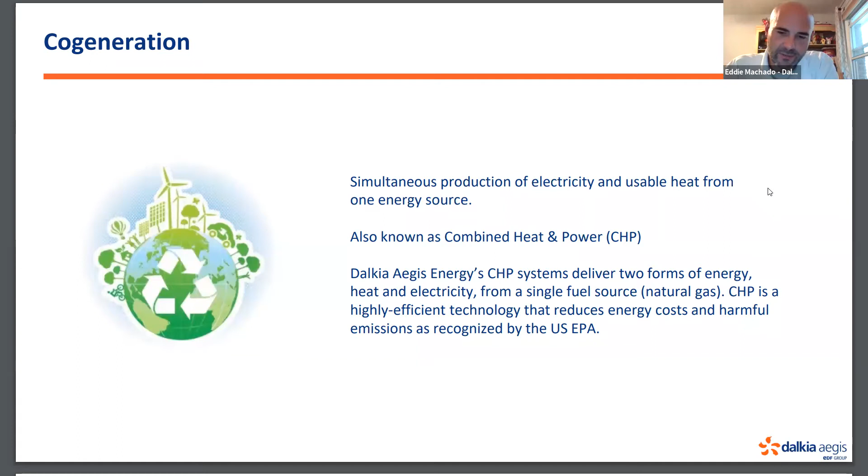As far as advantages, what we believe differentiates us from those in the space is really one point and one source of accountability from start to finish as it relates to cogeneration. So the first step in our process is to work with those individuals who are either advising facilities management and decision makers, or those directly involved in the energy decisions for their facilities.

We really start with a full financial grade energy analysis by looking at the utility billing and assessing exactly what sort of consumption exists in any facility, so that we can talk about what sort of on-site assets can be deployed and utilized in the most effective and efficient way. This is a financial grade analysis that can be utilized for financial purposes, as far as loans and other things, and this can also be insurance backed, so you have a certain level of guaranteed savings that can be realized.

As far as the financial assistance, obviously we work with our clients to help them both in terms of assessing different incentives that exist out there, as well as tax credits and incentives, so that the financial analysis that is done takes into account the overall cost of what it would be to implement this sort of strategy.

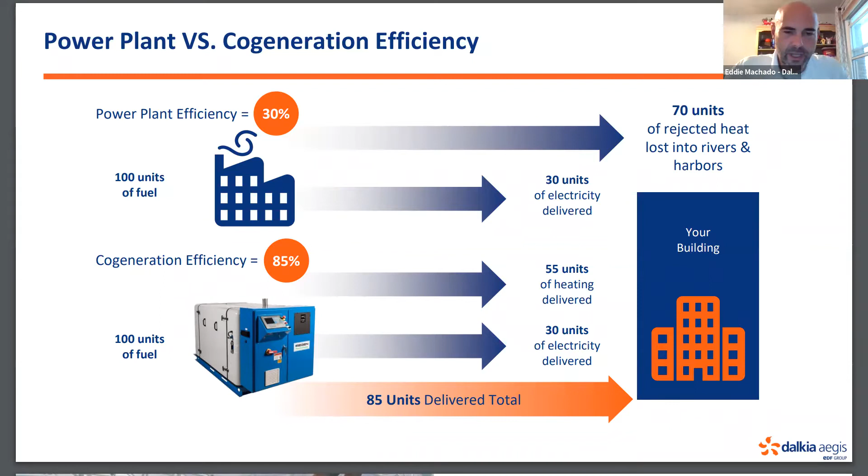So there are obviously a lot of benefits here, and we can talk about the LL97 exposure - this is a primary reason why there are certain benefits as it relates to that. So let's talk about those benefits. Obviously, you're going to reduce your electric costs. Anytime you implement a CHP system, your returns are going to be in the 3 to 6 or 7 year range.

Obviously, you're going to have resiliency, 24/7 monitoring capabilities and operations, and you obviously have backup power availability. We do have units that have those capabilities. You generally don't get a 3-year return on something like this based on the interconnections and added complexity, but you still are getting a great return on investment. As far as other benefits, you have reduction in emissions, carbon footprint, and the efficiency there - 85 versus 35 efficiency.

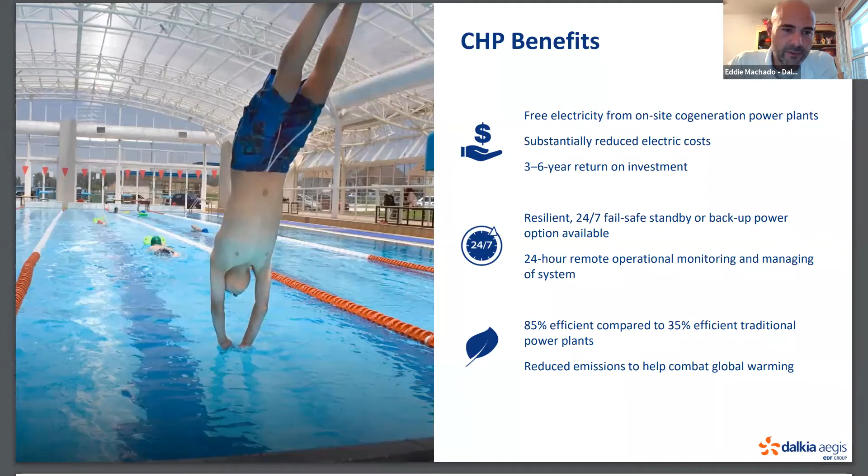And of course, you have better ways to reduce your local law exposure, and we obviously show that through the analysis, both as things change over the course of implementation and how that's going to help reduce those fees. So typical savings, you're really looking at between 15 and 55% reduction in your utility costs, and that is net of the maintenance costs associated with keeping the unit running. Typical return on investment, as I mentioned, is between 3 and 7 years, and then you have carbon footprint reduction of 55%.

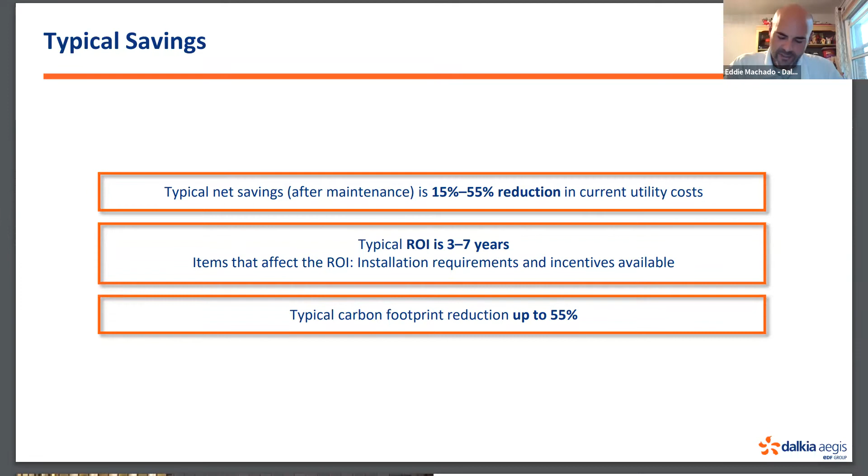Now, in terms of some of the markets where cogeneration makes a lot of sense in the micro CHP space, you're really talking about multi-unit residential buildings, healthcare where you have a need for resiliency and 24/7 operations. We do a lot of work with recreational facilities as well, gyms and spas and the like. Hospitality, as we know, has been hit a bit with COVID and occupancy, but certainly as they go back up and running, one of the main things they're concerned about is the cost of energy and how a system like this can really help reduce their exposure and long term help them get a return on that investment.

And education, obviously K through 12, is a big market for us. We're getting more involved in the higher education space as it relates to microgrids and off-grid capabilities. And then obviously specialized markets like breweries and other applications where you have higher therm requirements. Military is also pretty big for us in terms of resilience, like the healthcare that I described, as well as the pharmaceutical space. So CHP applications are really great for this sort of environment, where you certainly get the return on investment and the types of savings and carbon reduction that I mentioned before.

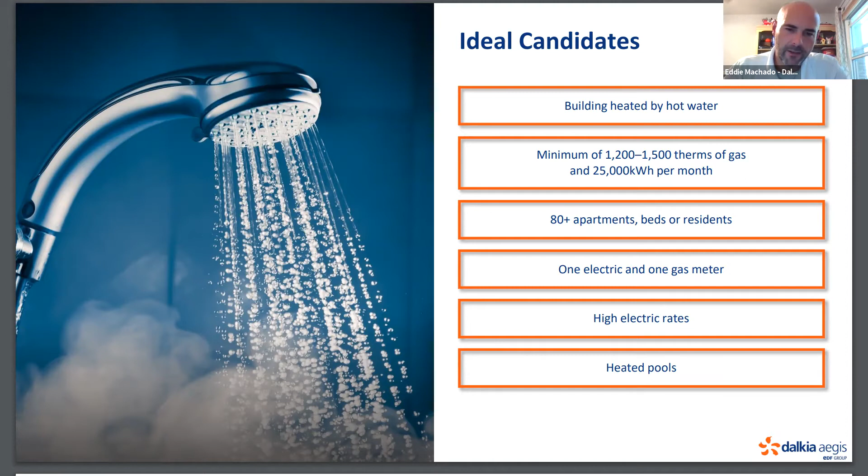Generally speaking, you're looking at 80 plus apartment units, or in a healthcare setting, 80 plus beds or residents, as your typical ideal candidate, where the numbers generally work quite well. If it's a centrally metered building, then you have a tie-in where connections are much easier, and you can deploy that power through that meter. Any market that has higher electric rates is where you're going to get the better, larger arbitrage between the different fuel costs, as well as that 2-for-1 exchange, where you get higher savings capabilities. And of course, if you're dealing with recreational facilities that have pools and spas, you're going to have higher thermal load thresholds, like breweries, where CHP is going to be a really good application, especially on the micro CHP side.

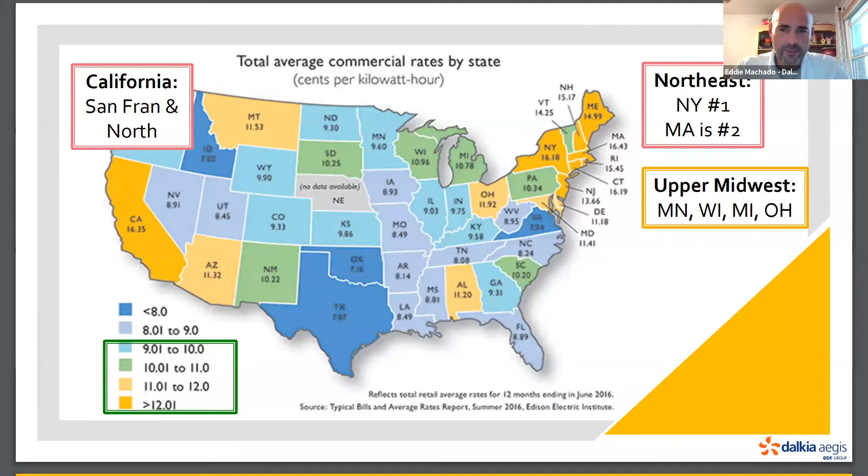So again, this is a quick map, it's an older map, but anything you see here that's in orange, yellow, green, or light blue is where CHP is going to make the most sense, where you have the higher costs that's going to help generate the kind of returns that a system can really help to generate. And then this is an example of what a New York City installation map consists of.

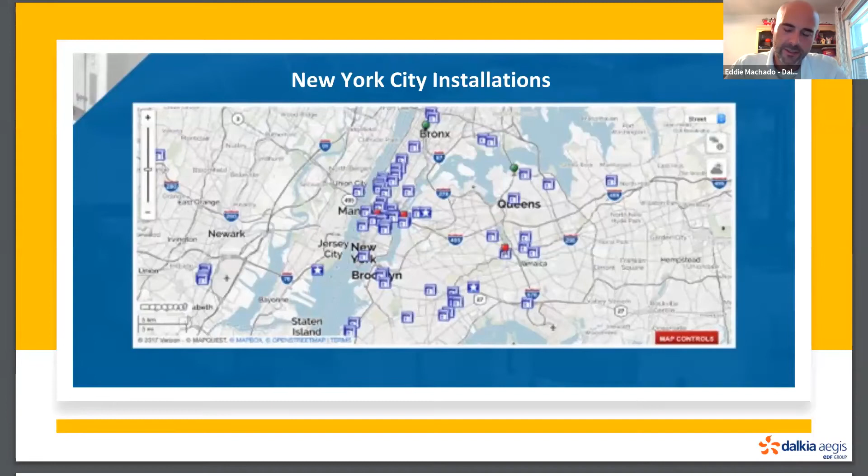Now, in terms of footprint, we have been in the market since '85. We've deployed over 1,000 of these systems. Our major footprint is really DC to Maine. We've done some projects in the upper Midwest and the West Coast, but I'd say over half of our systems are in New York City. So we certainly understand the market, the challenges, as well as the ongoing changes, and how this type of technology and platform can really help those managing these facilities to reduce their costs and have positive cash flow relating to that.

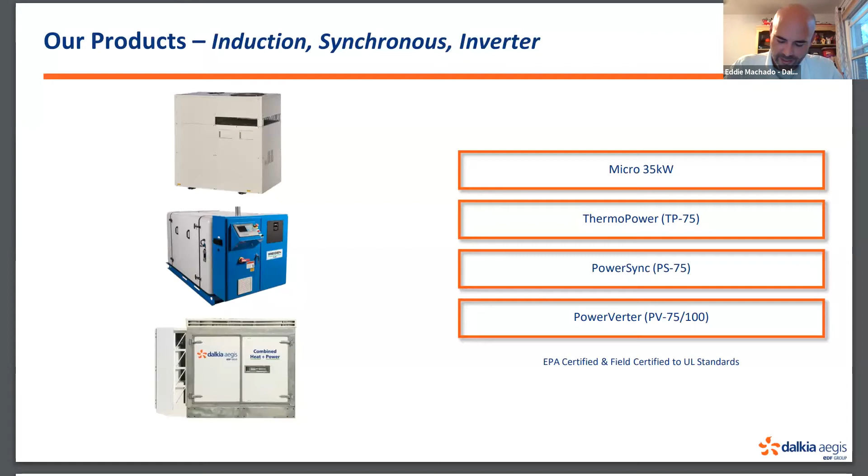So this is a brief slide about our products on the micro CHP side of things. Obviously, sizes ranging from 35 kWs to 75 to 100 kWs, which can be stacked for larger applications. Some have backup capabilities, and obviously these are all EPA certified units. And just to give you a sense of aesthetically what they look like, and give you that exposure as well.

And this gives you an internal view. Now, if anyone's interested in more information about this, I can certainly send some more in-depth specs. But everything you're seeing here in red is really where you have the heat recovery. That's where you're going to get the temperatures needed for the heating, as well as the cooling elements needed to maximize the unit. But this is what it looks like on the inside.

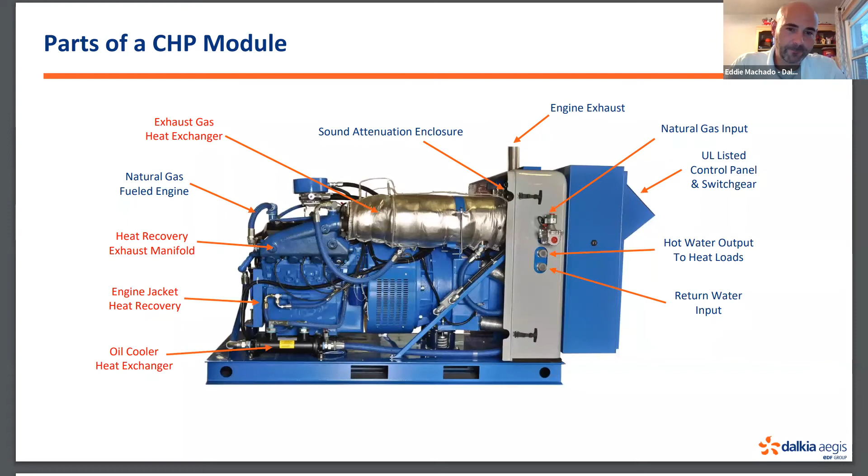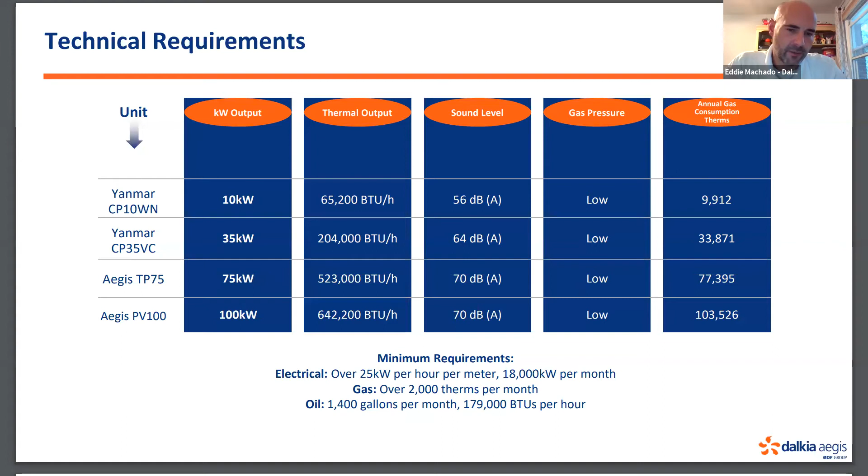And this is just some technical requirements to give you a sense again of the sizing of the thermal outputs. They can all operate on low gas pressure, and then you have the consumptions of therms. But one thing to point out, something we hear about all the time, is the concern about the noise and sound quality of these units. And what I can tell you is between 56 and 70 dBs, you're really talking about the sound of a high-end dishwasher. So these are quite quiet—probably the quietest item in the mechanical room.

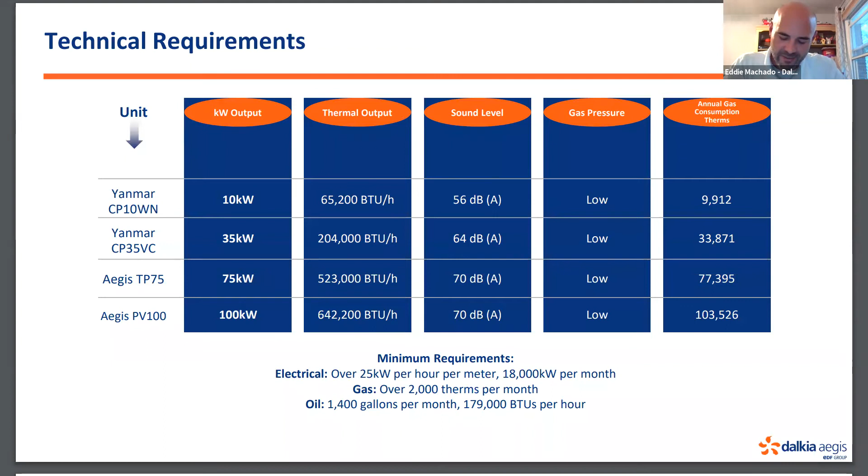Those with experience with CHP, who've been exposed to some of the older units that are 20 years old or more, find this hard to believe, because those units can be quite loud. That's something I get asked about a lot in terms of sound.

Here we're talking about CHP cogeneration and how it compares as it relates to resiliency. We're comparing battery storage, biogas CHP, solar, wind, and standby generators, given all the vulnerabilities out there, especially with changing weather patterns and everything we're seeing in terms of elevation.

What you can see here is that for a resilient application, natural gas CHP is going to provide the best outcomes when it comes to resiliency. That's why we're doing a lot of work in the healthcare space and the military space—it's for this particular reason.

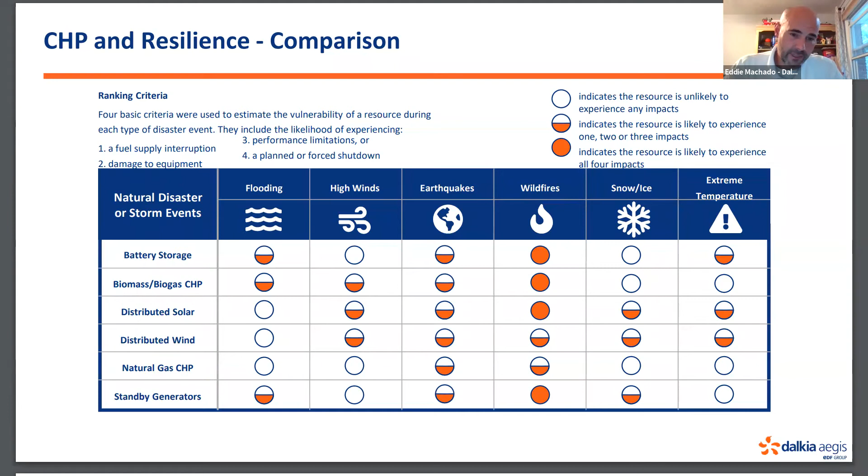So this is one example of that. We talked a little about our CHP Plus applications earlier, which is really a skidded combination of the CHP units—a combination of boilers, piping, heat exchangers, load modules, and metering. Everything is compacted into one.

These are all manufactured and put together at our headquarters. So for the end user, this means the time of installation gets cut dramatically, and the cost of installation is also reduced, because they're easy to bring to a facility and put together—more or less like a Lego set, where everything can be assembled quite easily.

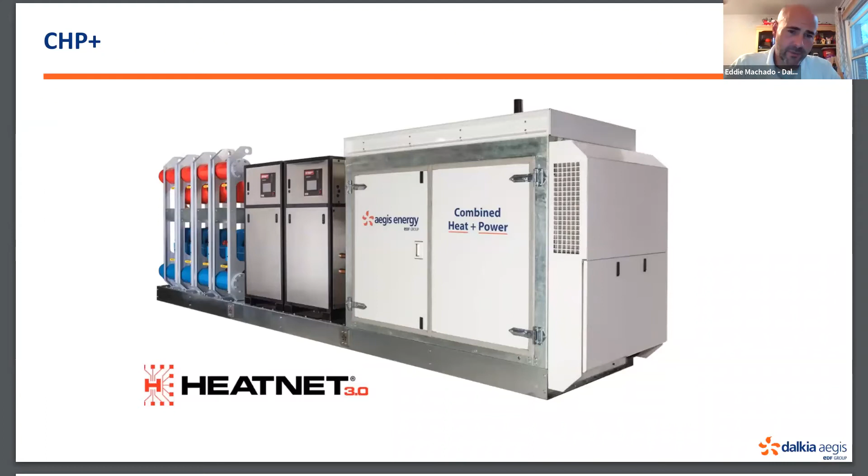So that's one example of that application. And here's another example—this picture was taken from an event we did pre-COVID, back when we did these things live. That's the front of a unit.

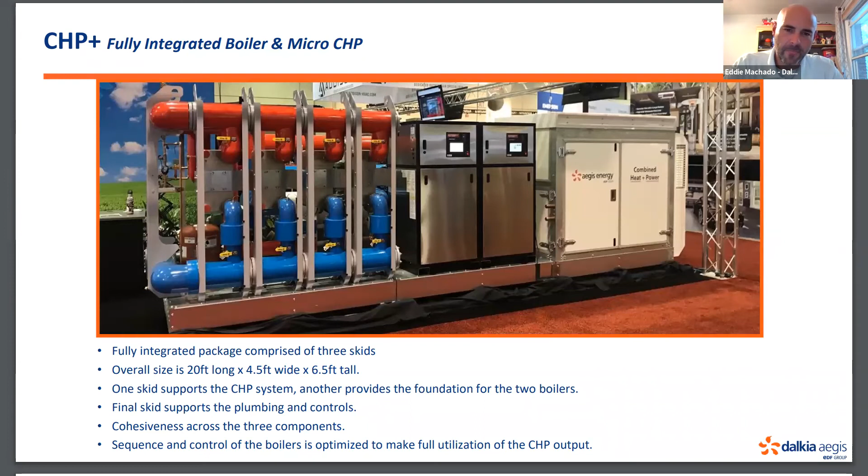That's an example here, and then here you have the very back of the unit, combining all three skids into one and making it either an indoor or an outdoor application. There are different ways to manage that process.

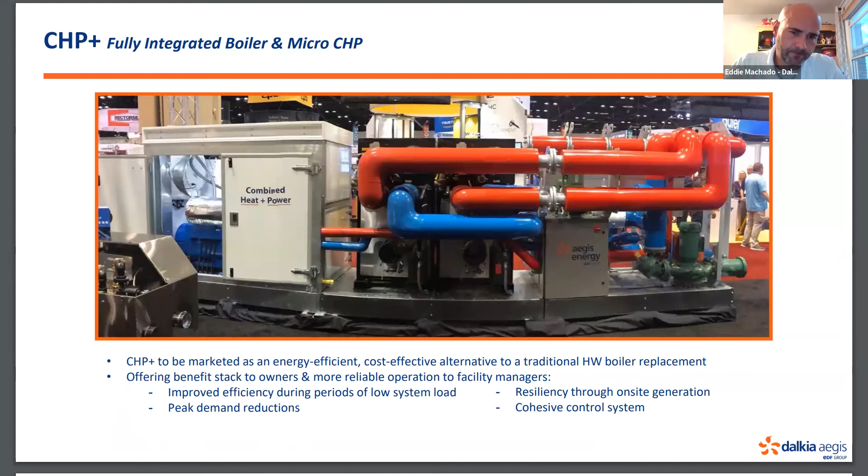Now, this is a little bit about the specs relating to the CHP Plus product specifications. We can certainly send that out to anyone who has interest in discussing this further.

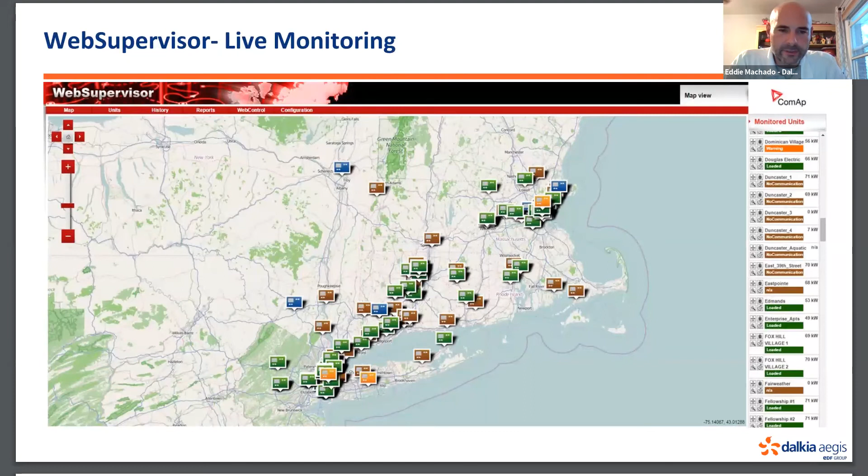Here we talk a little about our monitoring capabilities—this is a live monitoring web view. We can see our units deployed in real time, and we can see everything happening with the units in terms of temperatures, how they're communicating with the infrastructure and other thermal connections, and temperatures. We're able to see things in real time.

We're also able to make adjustments to the system to get the most power production, as well as handle preemptive maintenance remotely and identify problems as they happen, which allows us to handle a lot of the maintenance side effectively, either same day or next day.

In terms of keeping these units up and running, it's something we take a lot of pride in. In fact, when we do the analysis, we account for 5% downtime, which includes regular scheduled maintenance as well as any unscheduled maintenance that our monitoring station can identify, detect, and take care of.

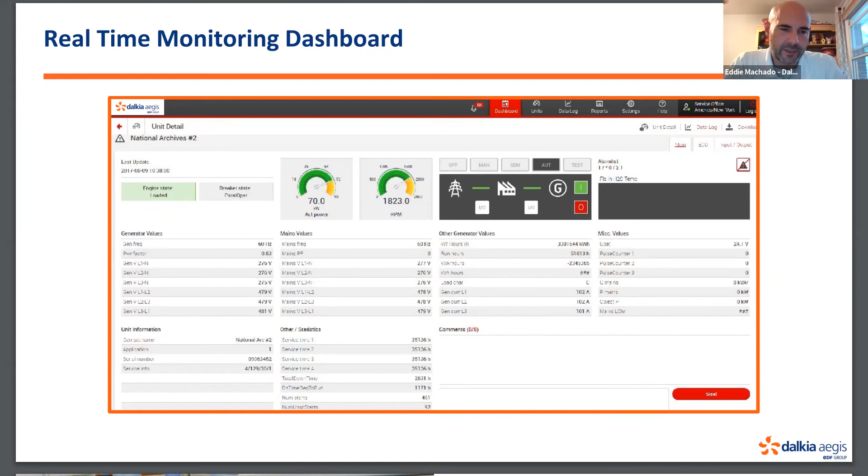We also have individuals in the area—wherever we have our units deployed, we have the staff needed to make sure these units are taken care of on a regular basis.

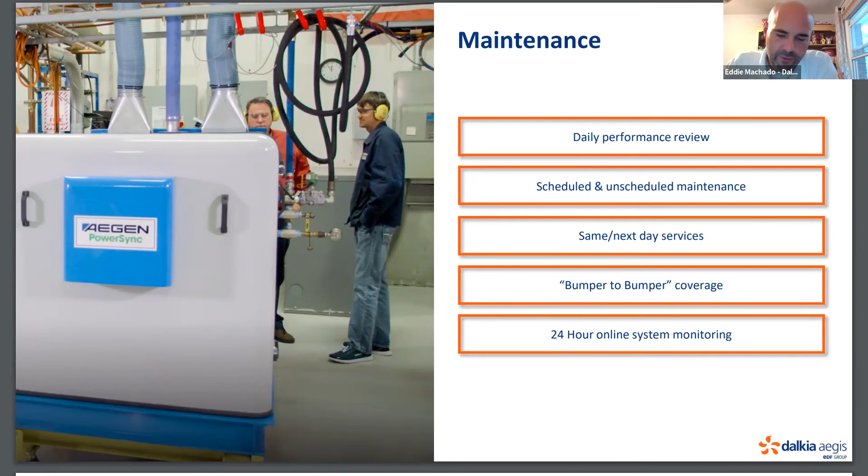So this is a little bit about our maintenance. We do daily performance reviews on each of our units. We handle scheduled and unscheduled maintenance, same day, next day service, and 24/7 monitoring of these systems. Our maintenance covers everything in that suite, bumper to bumper—a headache-free application where the end user knows that if anything happens, we're there to support them and make sure these units are operating at full capacity.

So let me talk to you a little bit about some examples of case studies. I have three here, covering the different end user profiles I mentioned before.

Here's one in Brooklyn, New York, where we put in 2 100 kW units with backup capabilities, costing about $1 million or so. After incentives, it reduced it to $660,000.

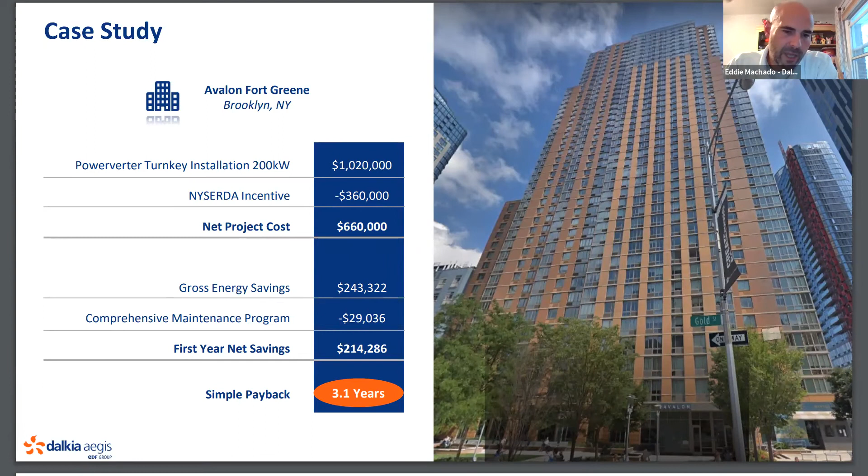If we looked at the energy analysis, the gross savings, you're talking about $243,000. With the maintenance program, that brings you down to an annual net savings of $214,000, with a simple payback of about a 3.1 year return on investment.

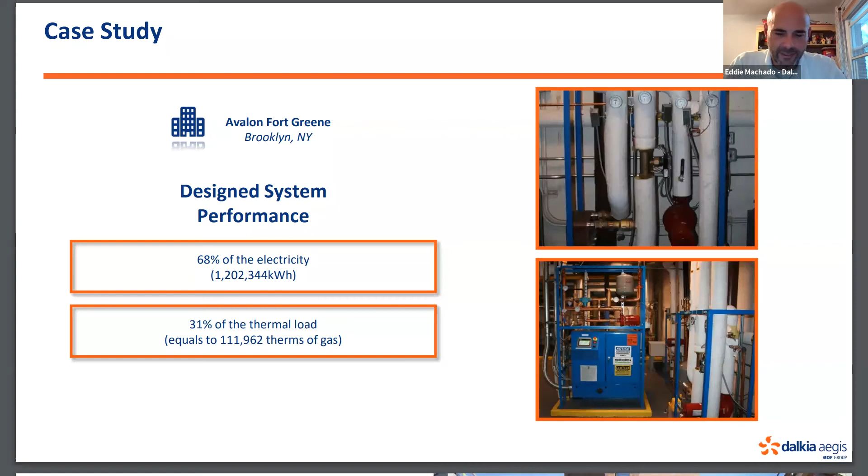As far as what our systems captured for this end user, you're talking about 68% of the electricity that the building required, as well as 31% of the heat that the building required. So that certainly helps to not only lower costs, but also lower the reliance on other sources of electricity. So that's one example.

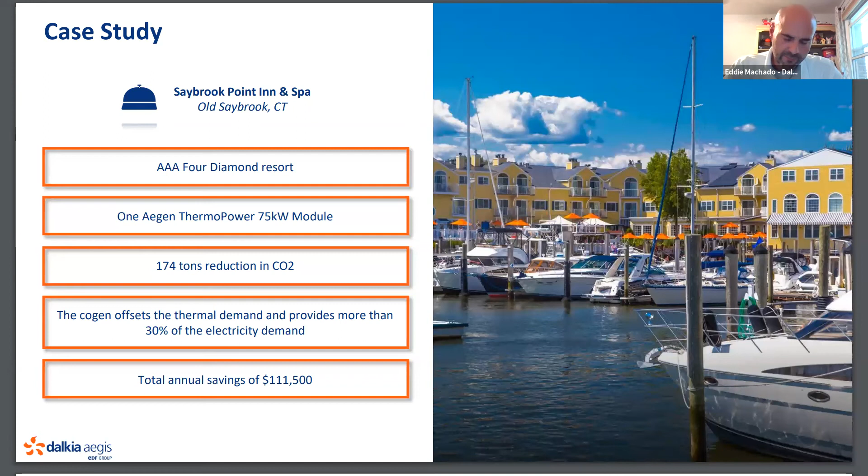This is one unit, 75 kWs, that we installed. We provided a little over 30% of the electric demands of the facility at an annual net savings a little over $110,000. So that's just 3 examples of 3 case studies.

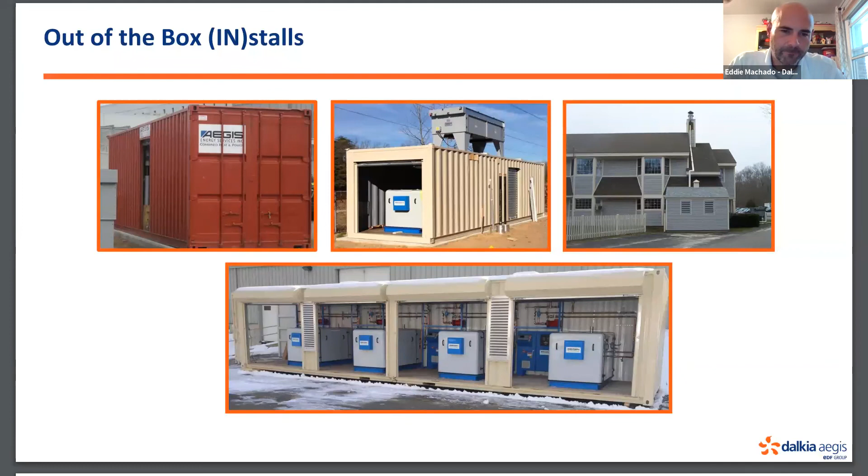As far as next steps in our process, if there are opportunities where you are either managing facilities or advising your clients in terms of what they should do as it relates to on-site power and cogeneration, what we do is look at the utility information, do that initial analysis, and go on-site to see exactly how some of these assets can be deployed.

We then conduct the financial grade analysis, as we talked about. We design the system and provide options, whether it be for a direct purchase where the end user can realize the long-term savings, or looking at different financial options through power purchase agreements, for example, that we administer ourselves as well.